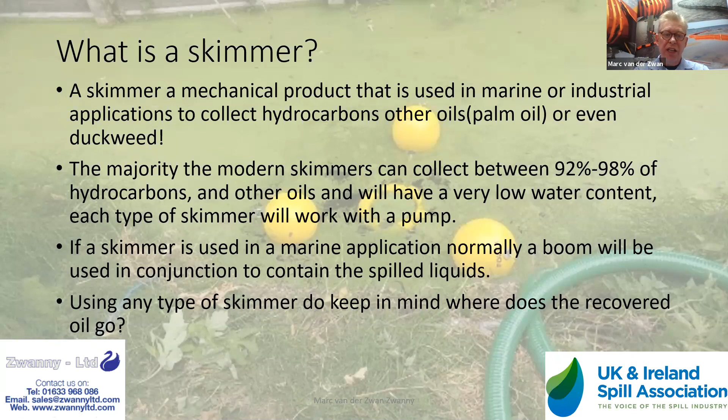Right, what is a skimmer? A skimmer is a mechanical product that's used for the recovery of oils, but it also can be used in industrial applications to collect hydrocarbons and other oils like palm oil or even duckweed. The majority of skimmers can collect between 92 and 98% of hydrocarbons and other oils with a very low water content. Each type of skimmer will have to work with a pump. Again, this might be all knowledge to you guys, but nevertheless, it's something that I have to and like to point out to yourselves.

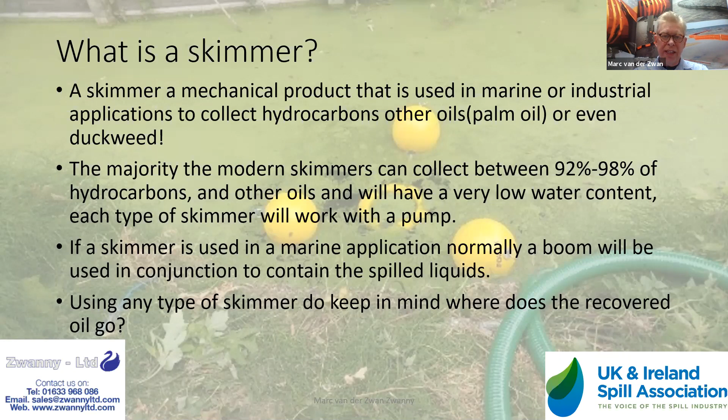A skimmer can be used normally in marine applications and normally would be used with a boom. However, it is obviously a critical piece if it's used in marine. If it's for industry, which I'll come to a little bit later, you'll probably see that industrial skimmers sometimes don't really need a boom. They can work on their own. One thing you have to keep in mind as well, when you use a skimmer, where does the oil that you recover go? That is just something to think about at this stage.

So the skimmer, how does it operate? Well, they can operate a number of ways, namely, you've got ship hydraulics, whereby the hydraulic power from an engine will operate the skimmer. It's mainly from the gears of a hydraulic engine on board a ship. You've got a diesel hydraulic power pack, which is a classic scenario really. And a number of different power units, stroke power packs, would be used to create different kW, depending on the size of the skimmer, how it's actually going to be used and what for.

For industrial use, it's sometimes pneumatic, and it's ideal because a lot of heavy industries, the likes of the steelworks and some of the chemical industries, will have pneumatic power on site, and it's just a matter of plugging it in, and the skimmer will work together with the pump and do its work. You also have the option of electrical. Again, that will mainly be in industrial applications, whereby the skimmer is just plugged into the mains and does its work. In this background picture, you'll probably see like a flat half moon.

Well, there's actually a suction skimmer that can be powered by a pump, and it can be used with vacuum trucks. So it's a very simple device. Basically, you connect it to a hose, and the hose is connected to a pump or to a vacuum truck, and it will actually take out the skimming.

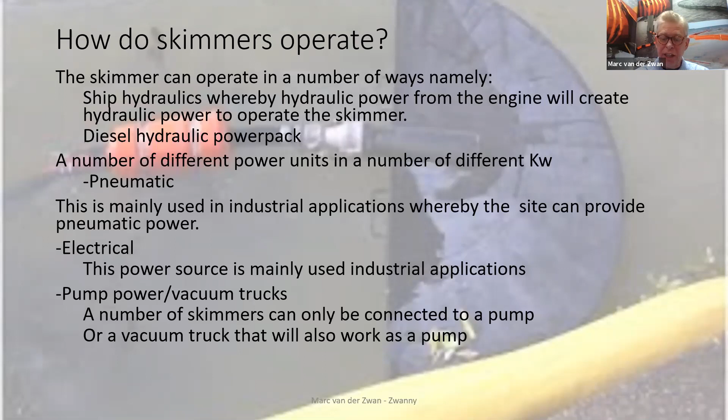Specifically in waste management, people are now moving away from the idea of cleaning a particular company's environment and just taking out a lot of the water. But this is actually a preventative measure, because it will only take out the oil and hardly any water. So it saves the end customer a bit of money in the long run as well, and it gives a few brownie points with the customer.

Skimmers, on the whole, can be put into two types of business sectors, and really that can be divided again into three little subsections. You've obviously got marine skimmers, which are near shore, on the beach, ports, marinas, those types of locations. You've got offshore. These are mainly used on board vessels or on oil rigs. And you've got skimmers that can be used for tropical or non-tropical areas like the Arctic or ice conditions.

On the other side of the scale, you will have industrial skimmers and basically industrial applications where oils are used. Again, as I said, the likes of steelworks, refineries, these types of areas. But there's also inland use, and that's actually on a small scale, the likes of canals, rivers, streams, ditches, and lakes. It's really for inland and fresh water.

Basically, with marine skimmers, it depends on what type of oil the skimmer is going to be used for, from diesel to crude oil, and each skimmer's capacity. The most common types of skimmers are used in ports and near-shore beaches, and will skim about 50 cubic meters an hour. There's a big range of skimmers on the market, and they can be put into different segments again.

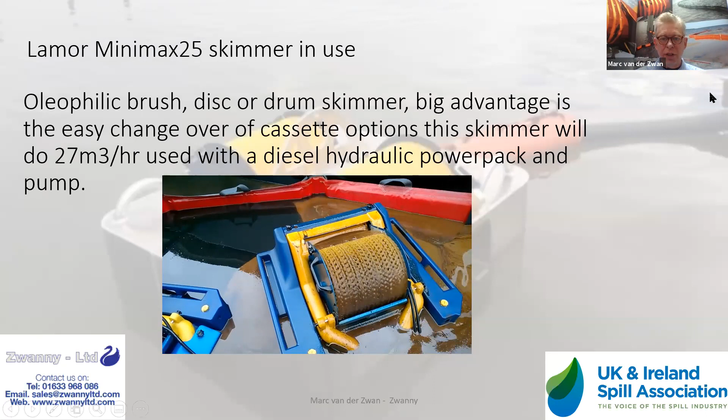We also got the micro weir skimmer, or weir skimmer. We were asked by the Department of Environment to supply them a number of the micro weir skimmers from Foilex. And they said, okay, we want to have them commissioned. We want to have them tested. And what do we use it on? And I said, well, when I was in the Middle East, we actually used oil, and it worked well with oil, but being the environmental department, I don't think that is a very good idea.

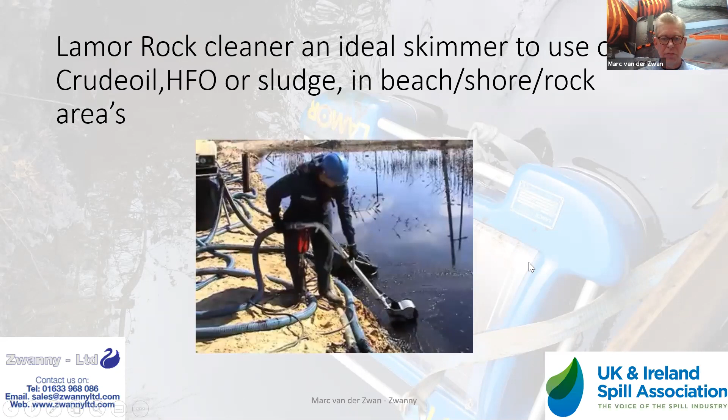Marine skimmers. I just touched on smaller than 50 ton an hour. Obviously, we go much bigger. There are a number of marine skimmers that can be used in conjunction with a crane or from land, in most cases used on board a vessel at sea. These can be put in a number of segments again: brush chain type or sweep cassette, weir skimmers, mop skimmers, and bucket types.

There are also cassette units that are connected to a vessel or on board a vessel in the moon pool, but I haven't really touched on that because it's a little bit special. We can do it, don't get me wrong. Skimmers to be used on the bow, on the stern of the vessel, on the side. But the same principle counts with the brush skimmer that is used, which is a brush chain type.

This is, for example, the Lamor LFF100, and it's an ideal piece of kit because it can be used for weathered crude. It has got heated scrapers for Arctic conditions, and enhanced recovery due to the brush rotation and the fact that it can actually go both ways. So it's never going to clog up, for that main reason.

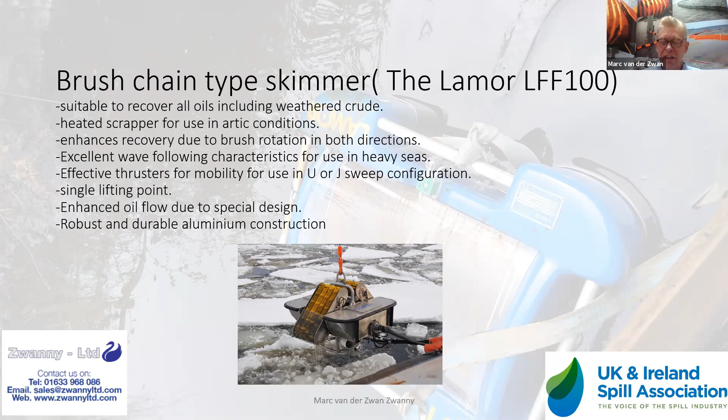It has a single lifting point. A lot of the time skimmers have various lifting points, but this is just one single one, so it's ideal to put into a particular situation. Enhanced oil flow due to special design and robust, durable aluminium construction, and it will obviously have a very long lifespan.

Very portable because it's just one piece of kit that you put into the water with a crane and take out again. And it's quick and easy to clean. So it has got a lot of plus points because of the simplicity of it. But it is another option, another tool in the box of skimmers.

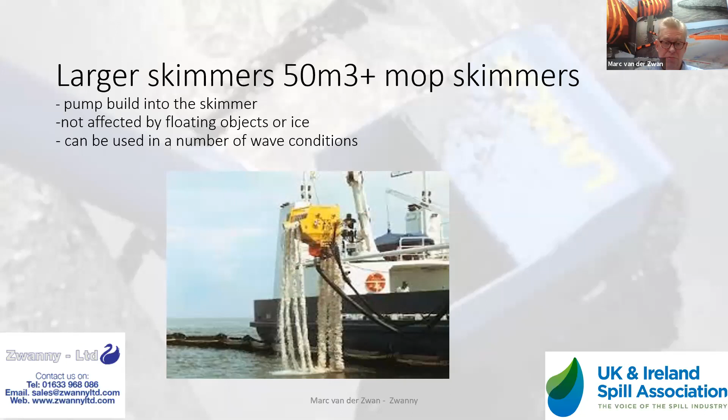And again, it can be used in a number of wave conditions, and it's ideal for ice because it's a simple concept. There are some other larger skimmers as well, the bucket skimmer, which some of you might not have seen before. It's a Lamor product, and it's a single operator unit.

It sits on the end of a boom; it's hydraulically operated and sits in the bucket position of an excavator, and can be used as a very heavy oil skimmer, for oils from light to bitumen and tar. So it's really the heavy stuff it specializes in.

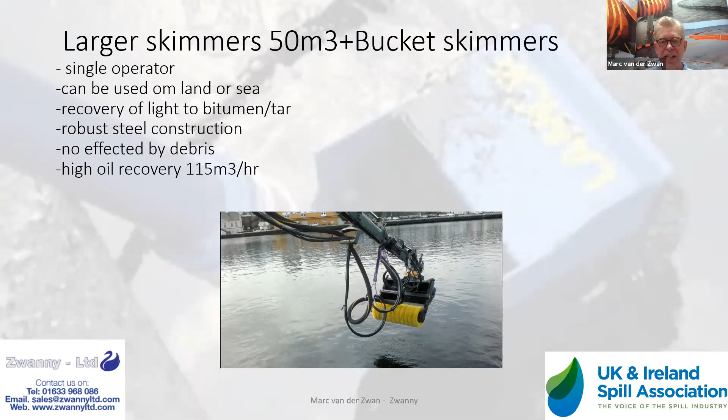It's a steel construction, and debris doesn't affect it because it'll just keep on going round and take it out. It does about 115 ton an hour, so quite a lot of oil can be taken up with it. And it can also be used on land, not just on the water.

We've obviously got industrial skimmers as well. This is the little industrial oleophilic skimmer. There's a range of them, and about this particular skimmer I'll tell you a little story in a minute. Industrial skimmers, the name says it all. They're used for industry, and as I said, refineries, heavy industry, waste treatment plants, power stations, and factories.

These types of skimmers will be used with a mix of oil types: heavy fuel, light fuel, tramp oils, waste oils, and they can again be put in little segments. The oleophilic skimmers, like in the marine sector, can go up to 50 ton an hour, and these are ideal for these types of applications. These types can be used in zoned areas in a refinery, providing the power is outside the zone. These skimmers can be used with a pneumatic power option as well, or electric power as an option.

We did it in one of the refineries not long ago. They actually used a diesel hydraulic power pack, but the hydraulic hoses were about 50 meters long so it could stand outside the zone area. And the skimmer was used in the zone area and worked really, really well. This was actually a Lamor Minimax 12, which I'll show you in a minute.

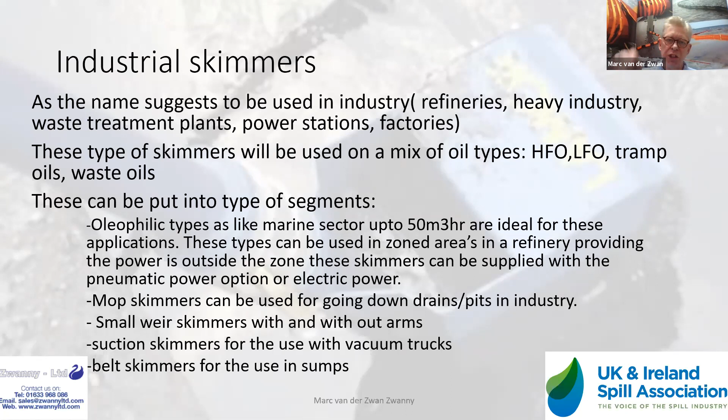Mop skimmers can be used as well, ideal for going down pits and drains. You've got smaller weir skimmers with and without the arms, and suction skimmers, which I mentioned earlier. And you've got belt skimmers, used for little sumps. Look, for example, at the automotive industry. They all have a little sump at the bottom of a machine, with maybe about 10 or 20 liters of oil in there, and the little skimmer will just happily go around and take it out.

This is one of the brush skimmers we used not long ago in one of the steelworks. It's an oleophilic brush skimmer from Lamor. And again, it has the interchange option of disc, drum, and such. And it's very easy to change. This will do 12 ton an hour and is used with a diesel hydraulic power pack. We opened the cover to show how much oil is actually taken out. Hopefully it will work without the sound, because the sound of the diesel hydraulic power pack in use is very, very loud.

But you can see here, no boom is needed, as I mentioned, and this is going around and taking out the oil happily. The oil is being recycled by the steelworks, and it's an ideal piece of kit, being aluminium as well. It is very, very robust to use, and as you can see, it's rather thickish goo, tramp oil that comes from the canals they've got in the steelworks.

What they do is, with all the machines and the cooling of the steel coils when they're made, water is put on them. So there's oil dripping from that, and it goes into various canals eventually, and then it's taken out. This is obviously diesel hydraulic, but we've also got a number of pneumatic units working in the steelworks, and they're working very well.

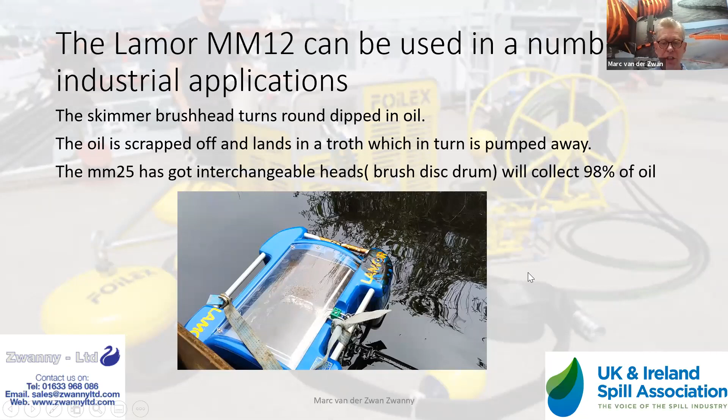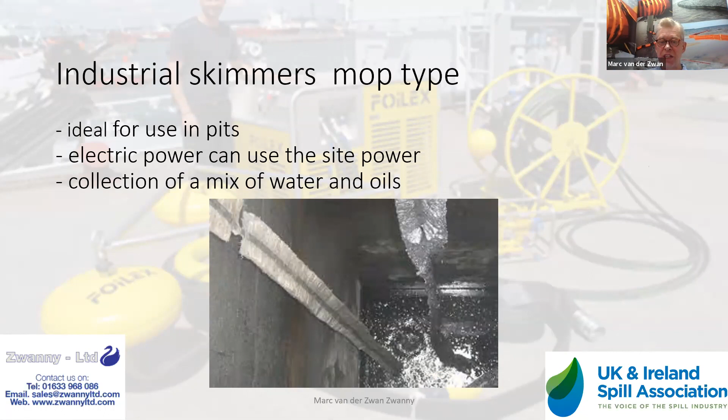And again, that's a widely available product from us. As such, we sell quite a few of these. We also got industrial skimmers, the mop type, as I said, and they're ideal for pits and for very, very deep down, basically. Obviously, electric power can be used from site, and it'll collect a mix of the water and oils. As you can see, it just goes down and comes up again as such.

Weir skimmers, I mentioned, for industry. We use these, there's a little Foilex mini skimmer, medium weir skimmer. They've actually used them in the milk industry, the dairy industry in Sweden. And I don't have the arms, but it's actually working in a number of ponds in this factory and taking out cream/oily material, which is then taken away.

It's a self-adjusting bellow, and so it actually goes up and down like that. The pump is connected to the skimmer, and it will regulate itself, the flow of the skimmer. And it's mainly used on a fixed installation as such.

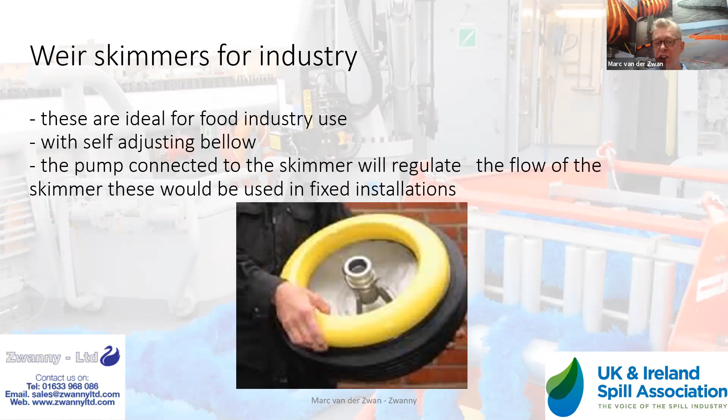We got the suction skimmers. For example, here we got the Manta Ray again. There are a number of options in the market of these type of skimmers. The Lamor Manta Ray is the only skimmer, to my knowledge, that doesn't clog up. Reason being is because obviously it can open like that.

It splits up. You got little hooks on the side, and any debris, as in leaves or little branches or twigs, can just be taken out by hand. And then obviously it closes up again, and it will function as such. Again, it's an ideal little piece of kit and handy to use with a pump/vacuum truck.

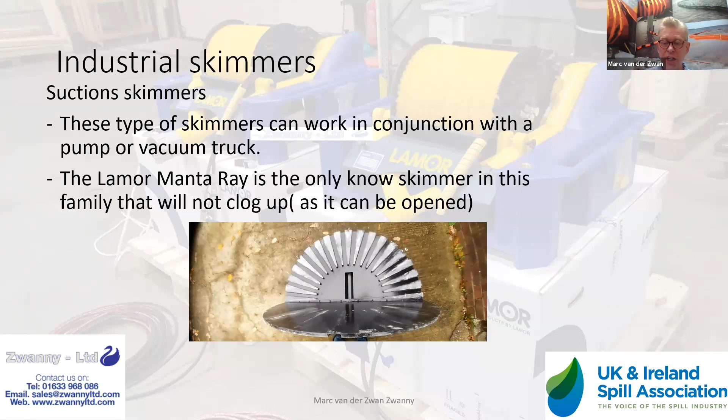As I said earlier as well, you have got the likes of industrial skimmers, little belt skimmers, and they're used for sumps and tanks and small industrial applications, and even for labs. And they go round and round, and the belts are about that big, sometimes about that if you have two next to each other.

And they do very small quantity, 2 to 5 liters an hour. So it's very small, but it's effective for its operation. And obviously they're all electrically operated via the mains from the factory.

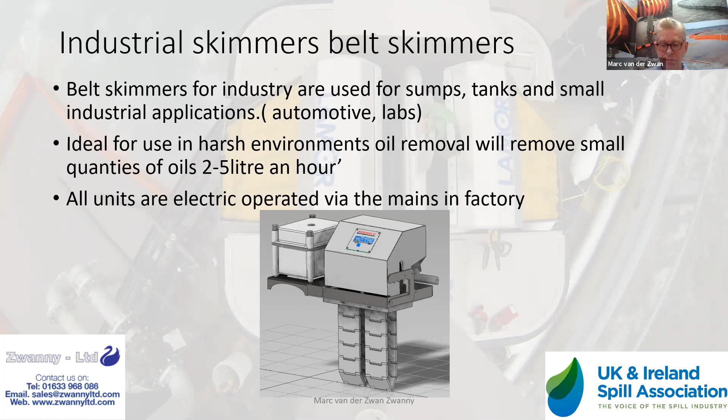Well, thank you for your time. Hopefully this information has been a little bit of use, to give you a bit of an understanding of what skimmers are used for. As I said, you normally would have a boom in a marine application, in conjunction with a skimmer, but it is specifically skimmers that we discussed.

There are obviously other skimmers that I haven't touched on. There are some new developments taking place from Lamor, for example, some bigger industrial skimmers. There is also one from a company I used to work for, Desmi, which I haven't mentioned. It's a very special type of skimmer. It's a belt-based skimmer, and it's available to the market. And obviously we do have these, what I showed you, available as standard products.

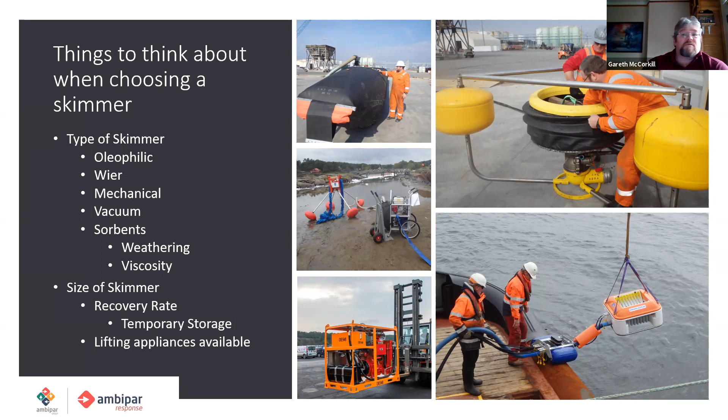So I'm just going to have a quick brief look at the different types of skimmers, because obviously Mark's already gone through most of these, but as you can see, the different types and different variations of oleophilic. Oleophilic meaning oil loving, so the oil sticks to it, and they are naturally then hydrophobic as well, which means they're water repelling, which increases their oil content as opposed to the water content. So they're particularly more efficient.

Well, I'm a big fan of the rope mop. Lots of people think that it's not so good, but I like using them in unison with another skimmer. So I was on a spill in a dockyard, in a filled dry dock actually, and we were using the rope mop to herd the oil and bring it back to a small Desmi Minimax that we had there, skimming attached to a spate, and then into a temporary storage. So we were using it essentially to herd the oil back to the skimmer.

So I quite like them in those veins, and as has been pointed out to Mark before, downhole skimming is their forte basically, but also when there's lots of debris. So rope mops are good for debris. I've got a case study a bit later to show you as well.

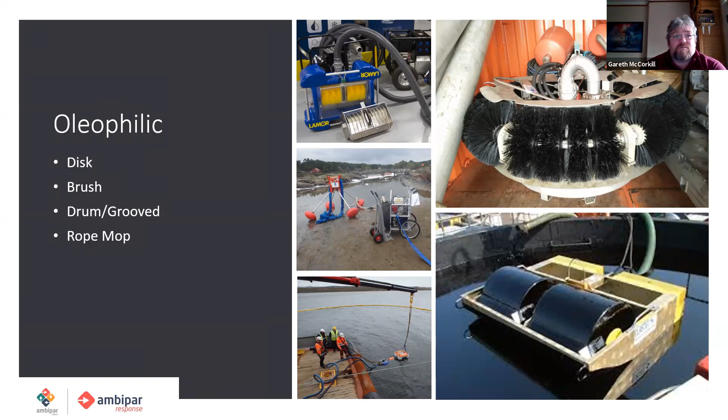So the next ones that you've already had a little bit of a look at is the weir skimmer. Lots of different types, but essentially they all use the same idea of the oil-water interface, weiring the oil and as little water as possible into the sump and then pumped away. Obviously, you increase the waves around it, and it increases the water content because of that. The oil-water interface isn't as steady, but also you must think that when oil is in the water, it has a calming effect on the water as well. So it's six of one, half a dozen of the other.

With the weir skimmers, you also have the active skimmer. So there's a picture there of the active skimmer. The top left-hand one, you can see it as we're putting it into the speed sweep, and the bottom one of those is us training it over the back end, and the larger on the right hand is when it's actually up and operational, and you can just see the hoses in the back of that, which are the hydraulic and recovery hoses, which come back to the vessel. That's an active system, meaning that the boom actually contains the skimmer itself.

So we're going to talk about the specialist skimming and booming options in another webinar, I believe. But they're good. My main problem with them is that you can't see the weir itself. It's quite difficult to see the oil-water interface at the back of the boom. So you have to keep on checking the actual recovery of it. So it means stopping, checking the water content, and then fiddling around with the weir that's there, which is a little bit tricky. But if you're going to have it deployed for a long time, then that's all right.

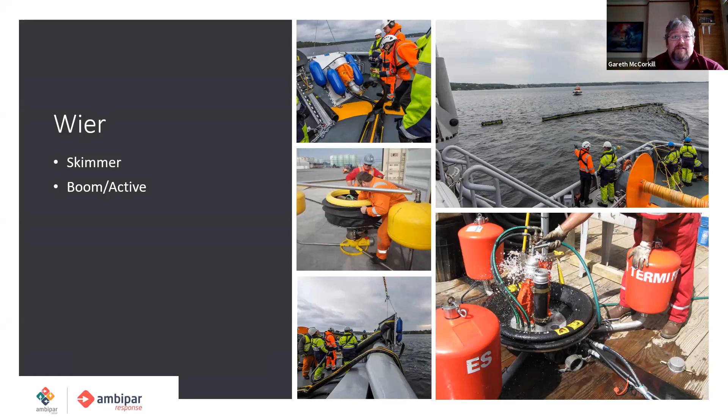Once you know what oil you're going to get, mainly for exploration and things like that, then you can put a targeted skimmer in, like a disc, brush, drum, groove drum, for your light to mediums. And then if you're starting to get into the heavy stuff, then you start looking at mechanical skimmers and tooth disc, which are the Star System and the Sea Devil. The good thing with the Sea Devil is that you can have steam injection into it as well to heat the product up, so you can pump it.

The big problem with that is as soon as it goes through the hoses, it starts cooling down, and then you can get blockages on the hoses. The other mechanical types are the belts that you can see there. That's the lovely Egmopol, which is a belt system. I think it was used on the Exxon Valdez, so it's got pedigree. And they're used, again, using the oleophilic properties of the oil, and it basically sticks to the belt. The belts also have sort of flaps on. It's like a conveyor belt, and that flicks it through down into the skip that you can see in the middle of the vessel there. And then when it gets properly solid, you're looking at clamshells. Again, that's closer to shore or on barges, and you're just literally scooping it up out of the water.

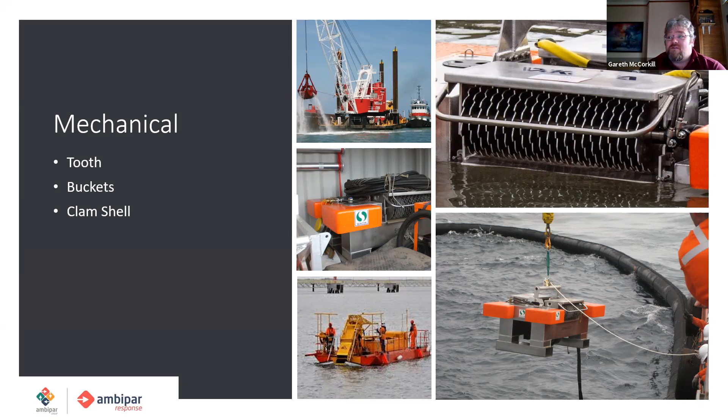The next option you have is vacuum. Vacuums are good from light to solid. So they're good for shoreline, very, very good for shoreline. What you've got there, in those pictures, you've got mini vacs, and you've got a delta head manta ray that Mark was talking about earlier as well. They're really good for attaching to suction tankers, and then you cut out your middle pump and your middle temporary storage. So it just goes straight into a vac tanker. You can also attach weir skimmers to vac tankers as well, which is quite good. Most of them come with lances, and as I say, they're pretty good from light to heavy.

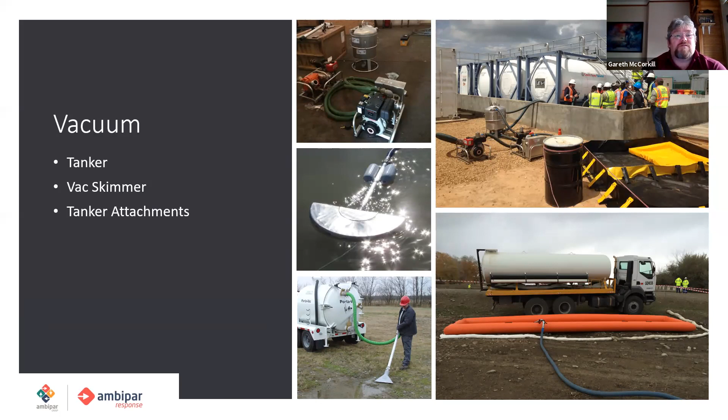I always get advised not to use it on anything lighter than diesel, because you're then taking in the vapors into a pressurized cylinder, which is something that you don't really want to do. So just to put that all into context, we've got a graph. If anyone's done an MCA course or an IMO course, they'll recognize this graph of efficiency. You're basically looking at a graph with the viscosity or the thickness of the product and the optimum efficiency. So you can see that the oleophilic has a very, very high efficiency on a reasonable range.

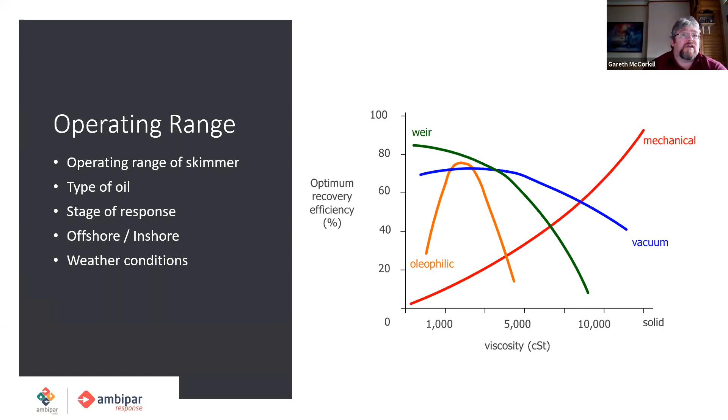But when you start getting into the heavier stuff, vacuums and the weir start dropping off, but the mechanical starts coming into its own. So again, you're looking at where you're going to be using the skimmer, the type of oil, how long it is going to be until you actually get time on top with the skimmer, so your weathering conditions, and how long that spill has been in the water. And that's the main points you're looking at for your skimmer selection. So there's not one skimmer that covers all of them, really. It's a combination of them, including sorbents. Using sorbents to herd and bring the oil into the skimmer is also quite a good idea, as you can see from my case study, which I'll show you in a second.

So the snags that I've got with skimmers personally is that the easier the skimmer, the better it is. The fewer moving parts, the more efficient and easier it is to train people how to use it. One bugbear is the QRC or QCC connections. Having some kind of standardization for that would be great, as well as standardization for lifting, especially lifting. Some of the skimmers are pretty heavy. We need to start thinking about putting lifting certificates with them, and making them nice and easy to wipe clean and rehab for the next thing.

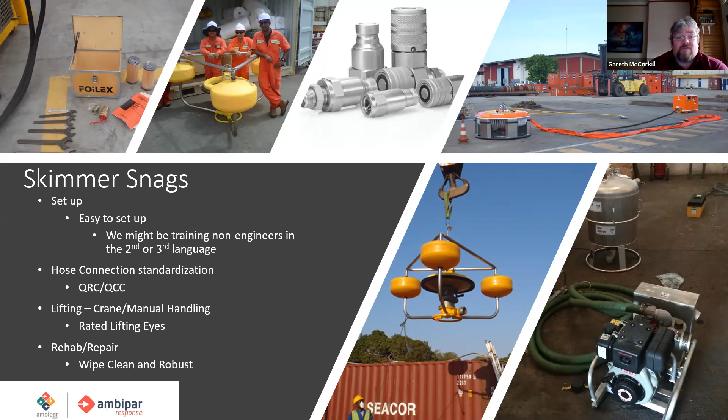So just a little case study I've got now. I was on an exploration rig, and we were testing, and we had a drop in pressure from the well itself. The flame went out, and then we had a spurt of pressure, which put a slug of oil into the marine environment. Luckily, the preparedness of this rig was very, very good. It had boom going around all of the rig, apart from a 50-meter gap where vessels came in and out.

And we had a spill vessel on standby with equipment and boom ready to react to this event. So the preparedness was very good, and that's the main thing about oil spill: the preparedness and being ready for it and having the kit there on station, essentially.

So we had this slug of oil go in. The booms kept it contained, which was nice. The spill vessel came inside the boom and closed up after itself. And then we started positioning the spill vessel like a boom, basically. So we were looking at where the oil was drifting, and we positioned the vessel on the corner of the rig in the drift pattern of the oil to act as sort of like an apex or a solid boom, if you like. We then used sweeps, absorbent sweeps, to sweep that into the corral area,

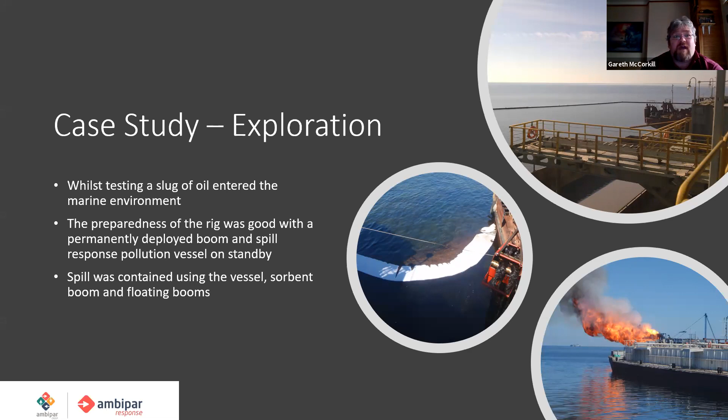and started recovering it with a foxtail. And the recovery was very good. There was also a lot of floating debris there, seagrass, which actually acted as a very nice natural absorbent, which we picked up. Obviously, the waste was kind of high, but other than the already floating debris, there was minimal impact to the environment, which was great.

The concentration of oil to water was very high with oil. You're looking at around 90 to 95% oil, which was nice. And that was all through the foxtail. No other skimmer was used, and through the natural absorbance of the seagrass. And it was a very successful spill response. It was very good, and that's using your absorbents, your vessels, your knowledge and your prior planning to lessen the effect on the environment.